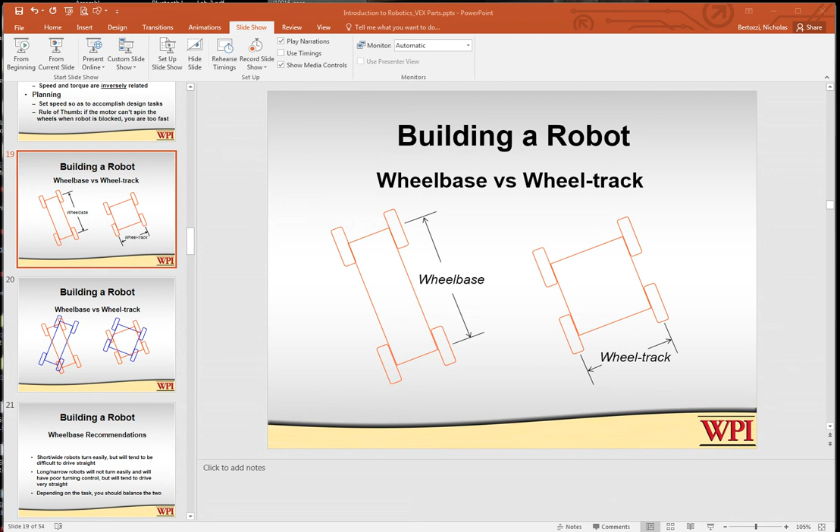This is the third video on this introduction to building a robot using VEX parts.

So we're talking about wheelbase and wheel track, the definitions of wheelbase and wheel track, and the advantages and disadvantages of the ratio of wheelbase to wheel track.

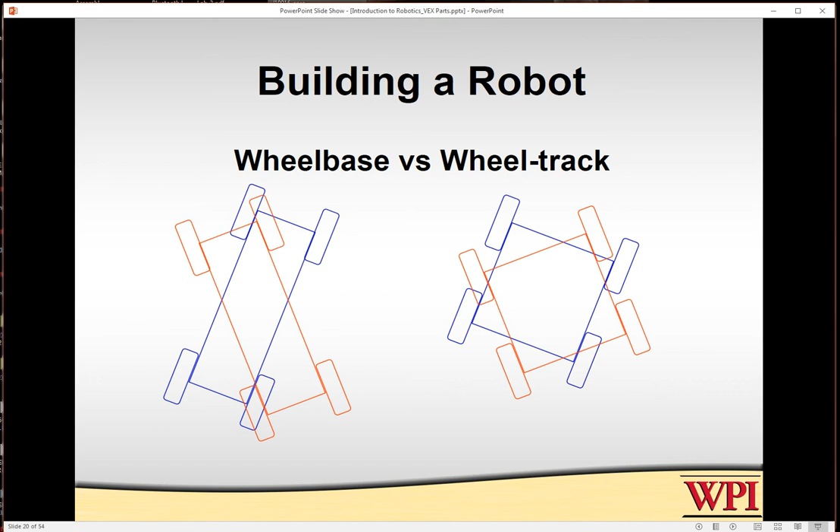The robot with a long wheelbase and a shorter wheel track ratio will go straight but be more difficult to turn. So short, wide robots turn easily. Long, narrow robots will not turn easily but will have more of a tendency to drive straight. So in your design, depending on what the requirements are, you can balance those two things.

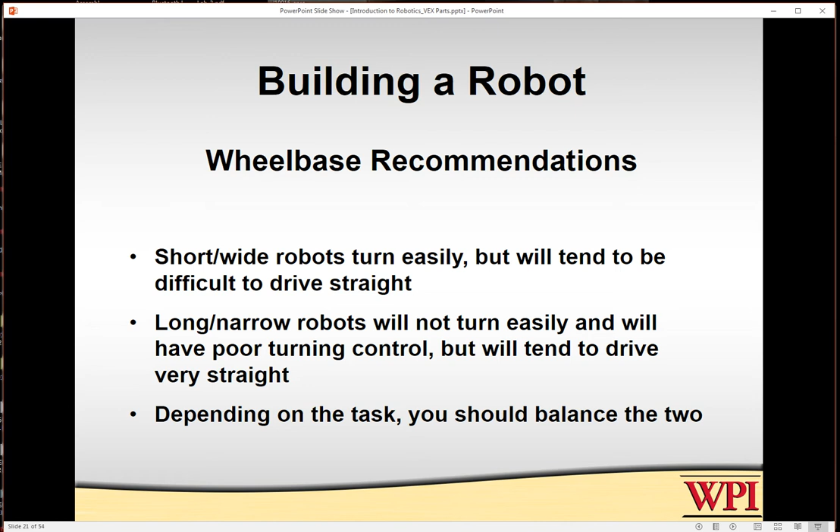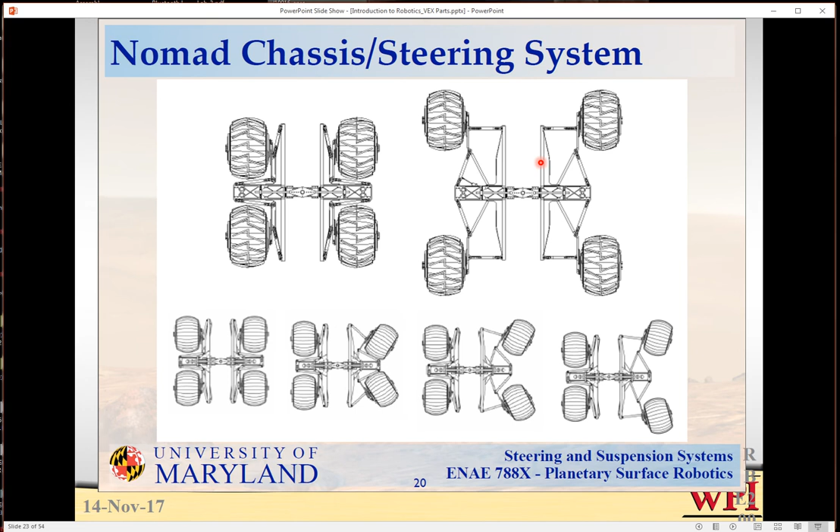Just wanted to quickly show an interesting robot here with an articulating suspension, and you can see that this robot, you actually have control over both the wheelbase and the wheel track. These can be extended out, so there's lots of different configurations that this robot can be operated in.

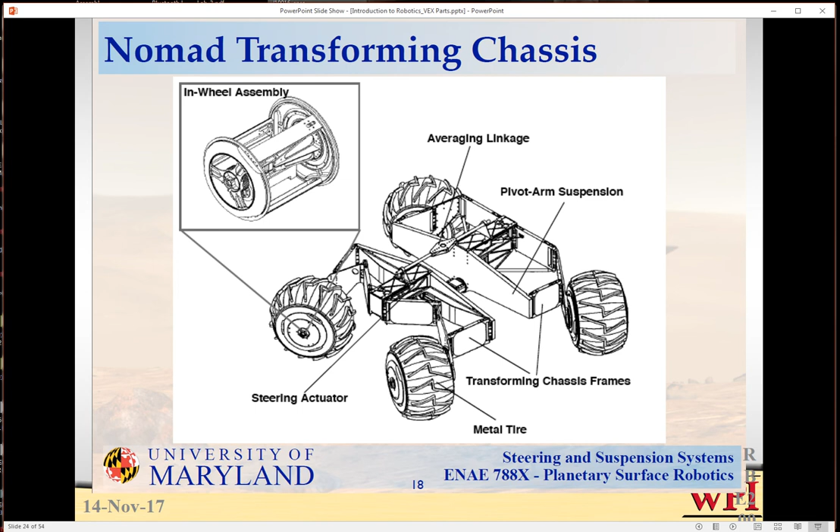So here, using this type of steering, you have a sharper angle for the inner wheels than you do for the outer wheels. This would be called a kind of Ackermann type steering.

On the other hand, if you have both wheels just going straight, like in this one, you can do the skid steering, which is the type of steering you'll do in your robot.

So here you have this dual Ackermann, where the wheels are turned, and the inner wheels are actually turned more than the outer wheels because they have to follow a tighter circle, a circle with a shorter radius. Or you can turn just by keeping the wheels going straight, but in this case you can just spin in place.

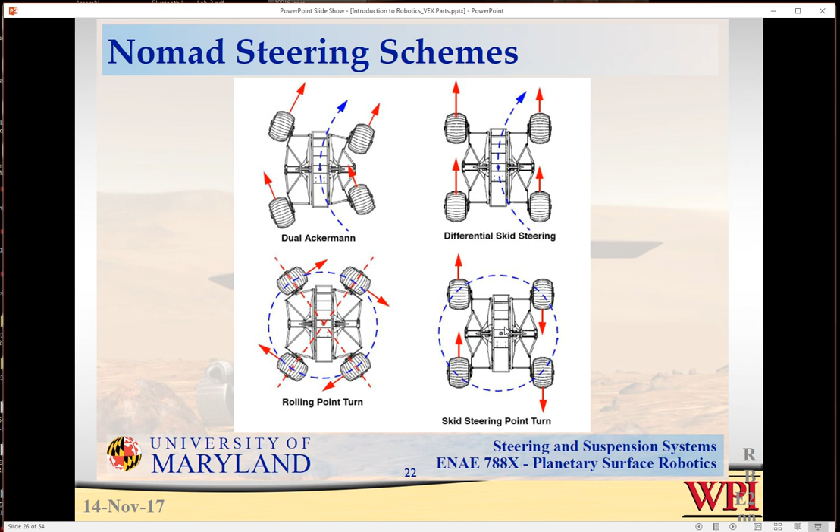You can see, especially as the radius of the turn gets smaller, the skid steering just requires a lot more power. So it's certainly simpler to build, but it does require more torque to do the turn.

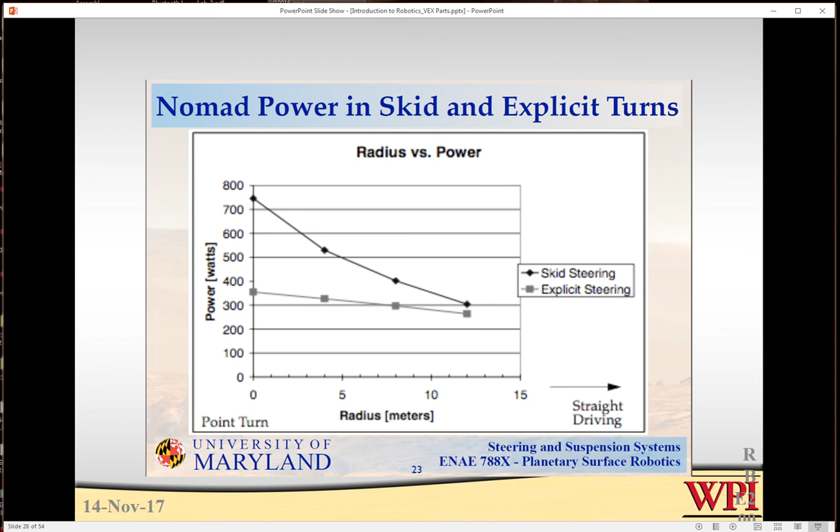So next we'd like to talk about the importance of supporting the shafts with bearings.

If you have one bearing, if you exert a force on the wheel, you can still see that you can still transmit some force back to the motor.

So ideally, what you want to do is either have a bearing on either side of the wheel, or if you can't do that, if the wheel has to be cantilevered out, outside the robot, you can still have a structure where you at least run the shaft through two bearings.

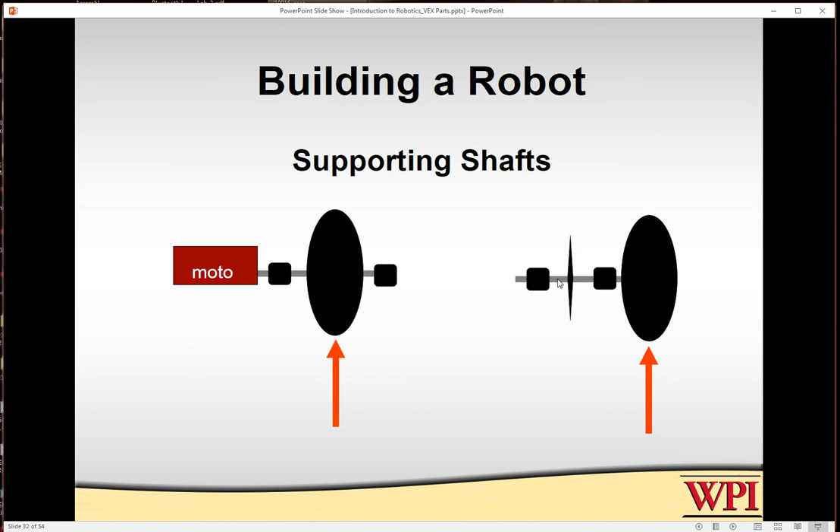So that way the bearings are supporting the radial loads from the shaft rather than the motor. The only thing you want the motor to do is just supply the torque or the twisting action to turn the shaft. You don't want it to actually support any lateral or radial forces from the shaft itself.

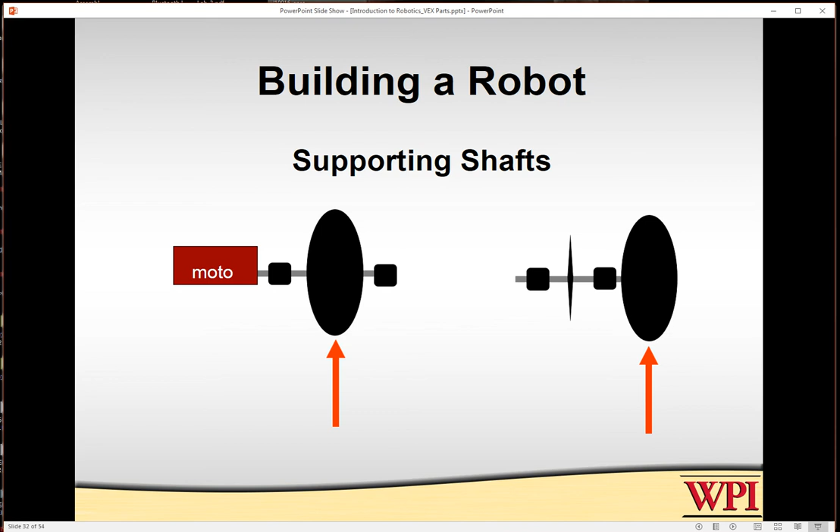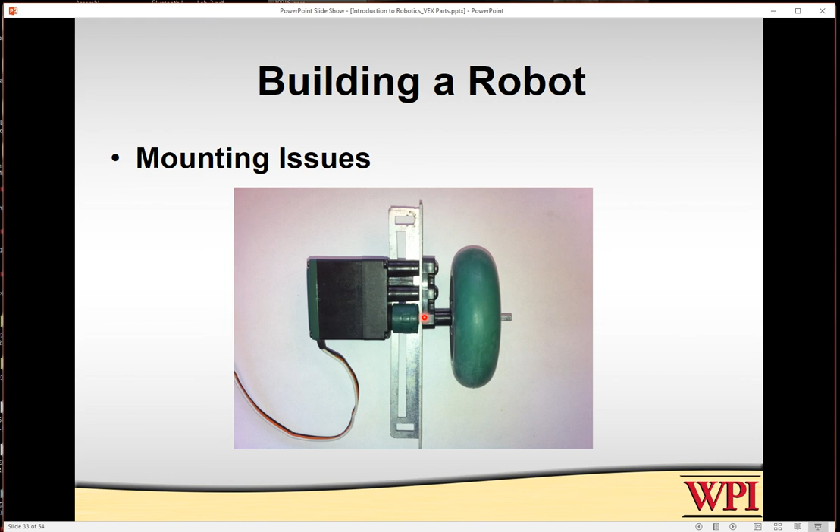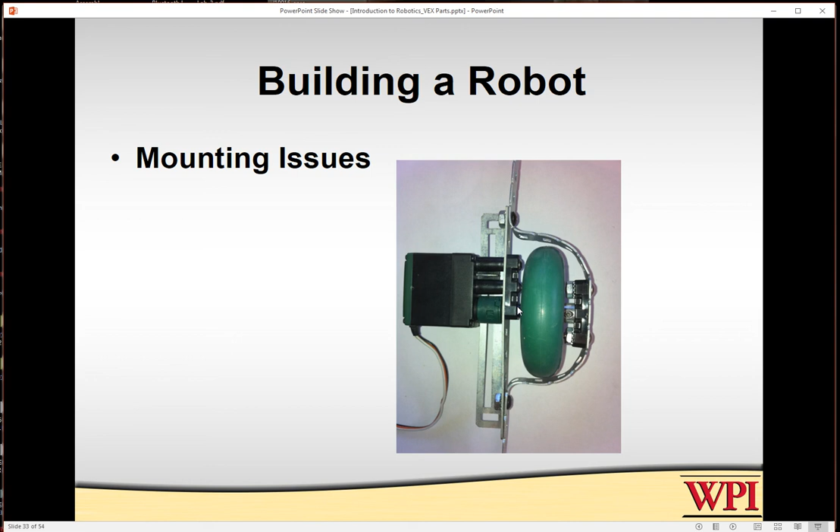And then you have the shaft at least running through one bearing. But a better way to do it is to have some kind of structure so you can have a bearing on the other side as well, which may or may not be possible, but this reduces the radial load on the motor itself.

So next we're going to go briefly through some of the VEX parts, and then actually go to the VEX website and show you some of the information that's available there.

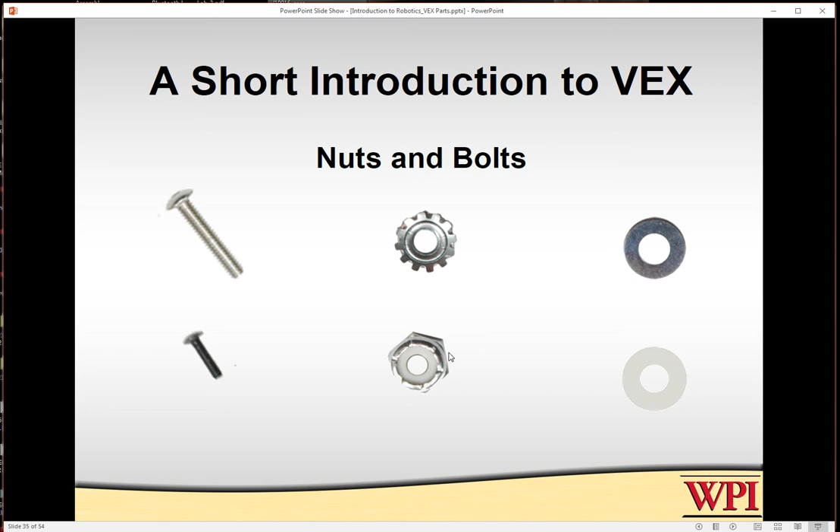So you can see we have different kinds of nuts. This is a Nylox nut. It has a nylon insert to keep it from loosening, and actually I'm going to have to stop here and pick up with the next video.